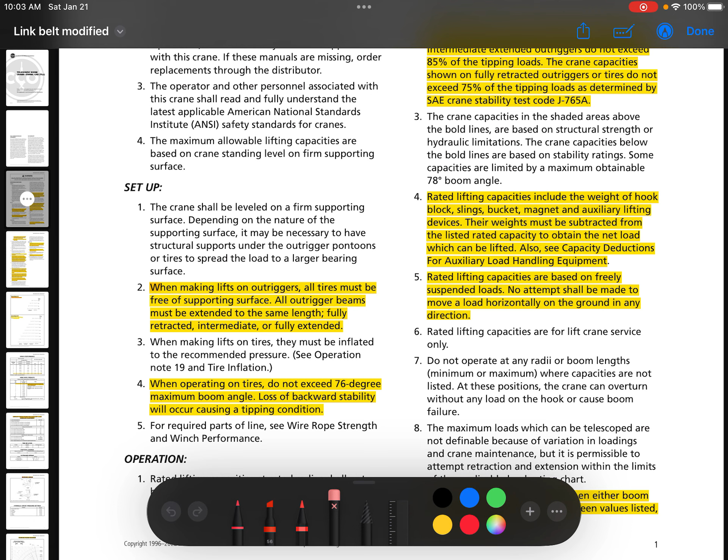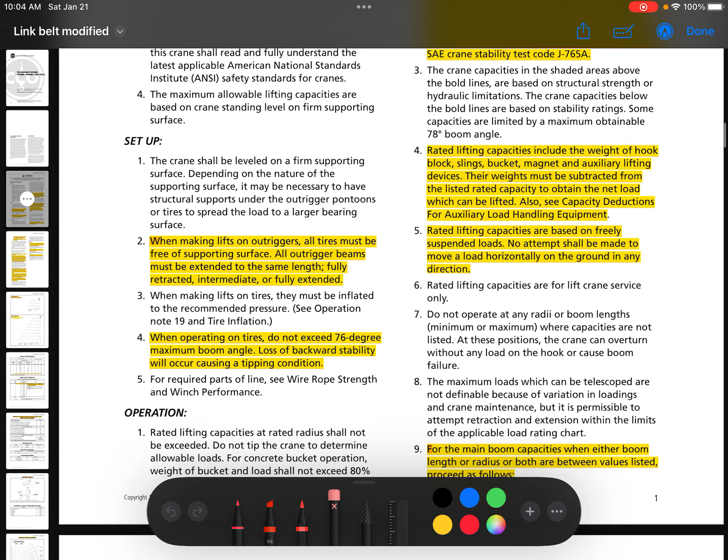So 2, when making a lift on all outriggers, all tires must be free of supporting surfaces. All outrigger beams must be extended to the same length, fully retracted, intermediate, or extended. So that's just saying your tires need to be free of the ground, essentially. You're technically not supposed to have your tires touching the ground. The reason being is they say, how do you know all the weight is off the tires? Because the tires are conversely part of the counterweight package, or the weight that's holding that crane on the ground.

4, when operating on tires, do not exceed 76 degrees maximum boom angle, or loss of backward stability will occur, causing a tipping condition. So remember that question. You might want to know it.

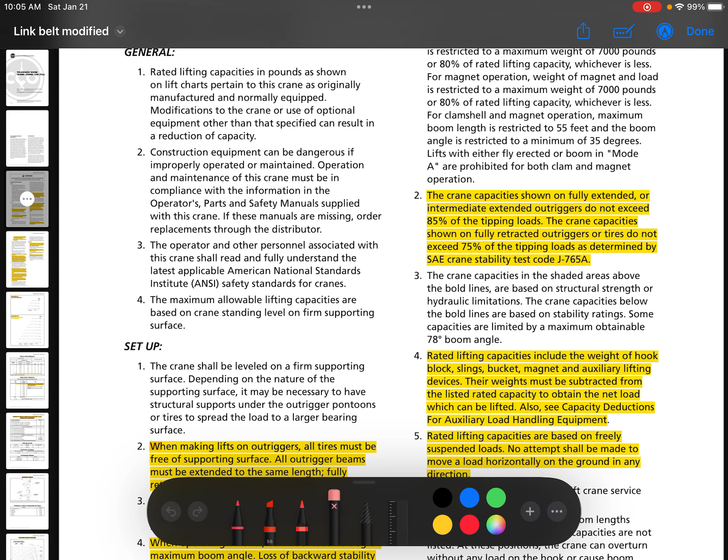Crane capacities shown on fully extended or intermediate extended outriggers do not exceed 85% of the tipping loads. So again, that goes back to 85% on outriggers, 75% on tires or tracks. That is your stability chart for the crane industry. The crane capacities shown on fully retracted outriggers or tires do not exceed 75% of the tipping load as determined by SAE Crane Stability Test Code. I'm going to jump down here to 4.

Rated capacities include the weight of the hook, the block, sling, bucket, magnet, auxiliary lifting devices; their weights must be subtracted from the listed rated capacity to obtain the net load which can be lifted. So your rated capacity, or your gross capacity in turn, is everything that your crane can lift. That number that's listed in the load chart, when you go to find your gross capacity, you look in the load chart. Your net capacity is that gross capacity minus your deductions.

So you take that rated capacity and you subtract. Say your block is 300 pounds. You subtract 300 pounds from that lifting capacity. You got a jib that's not in use, is stowed. Say it's 400 pounds. You subtract another 400 pounds from that lifting capacity, or that number that is listed in the chart.

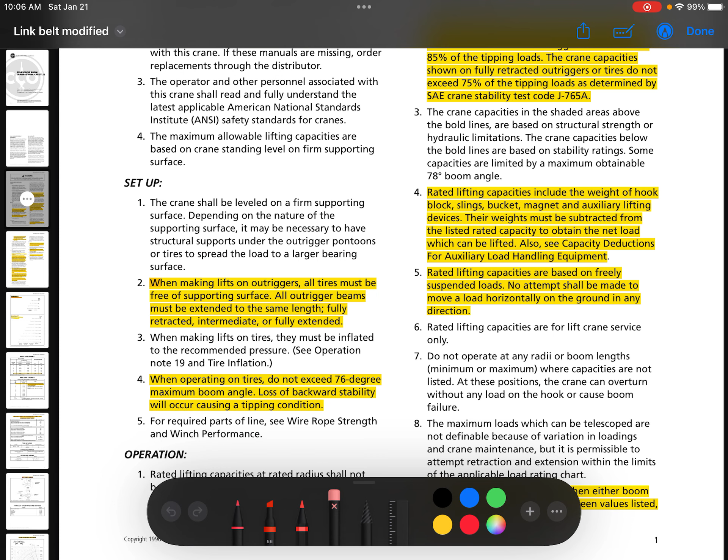Rated lifting capacities are based on freely suspended loads. No attempt shall be made to move the load horizontally on the ground in any direction. Remember that.

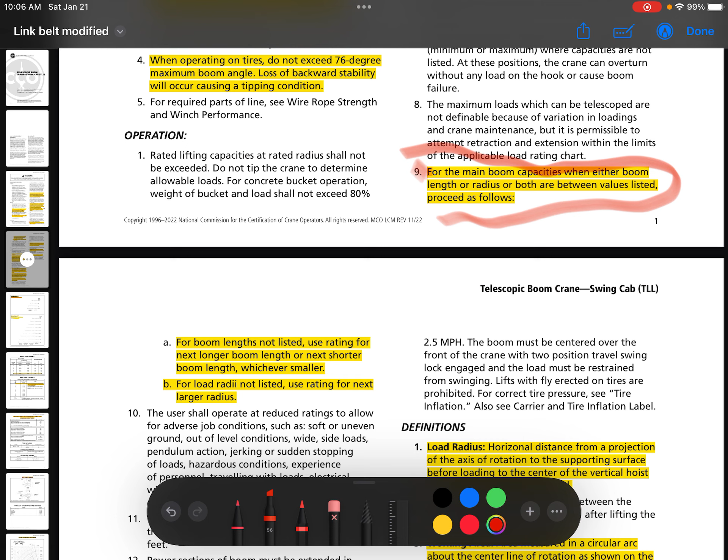9. For main boom capacities, where either boom length or radius or both are between values listed, proceed as follows. Remember this rule. You will need to know this for your test 100%. For boom lengths not listed, use rating for next longer boom length or next shorter boom length, whichever is smaller.

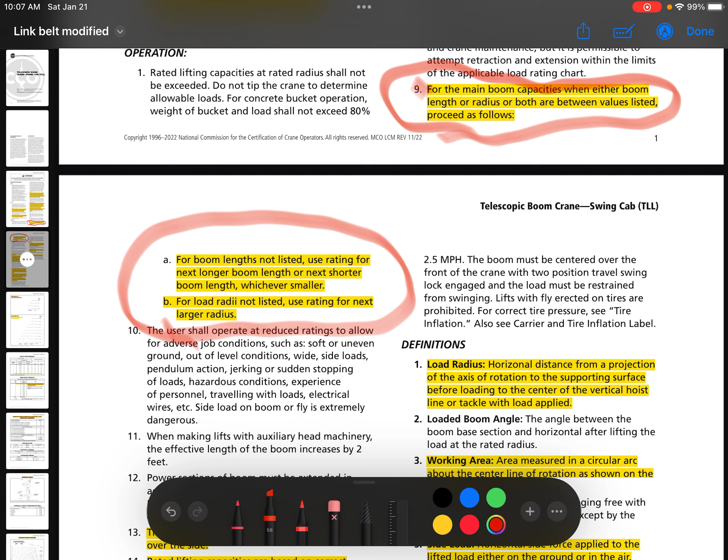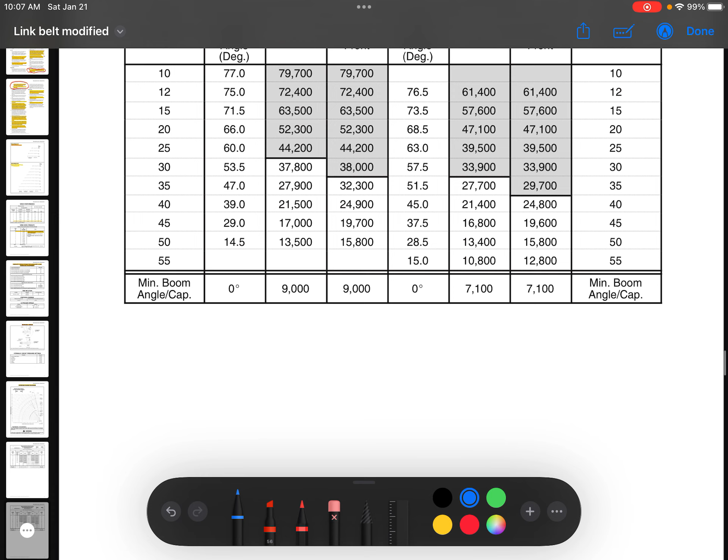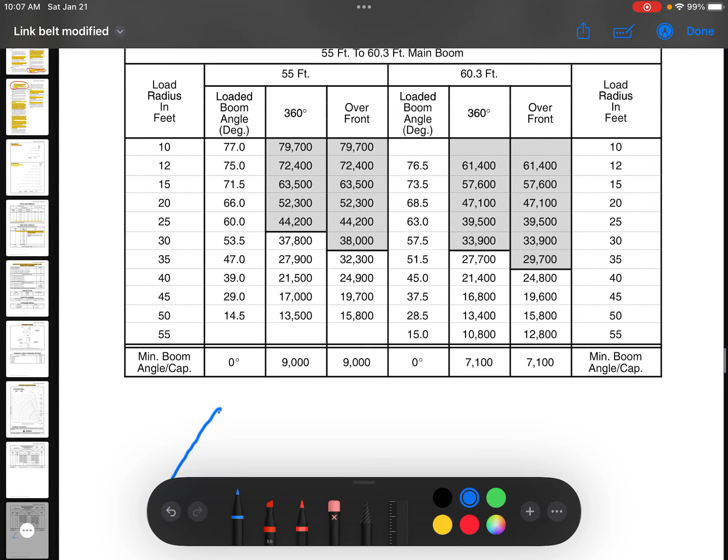All right. So what that means is we're going to come down here, just give you a little run through. Say we have a main boom length of 58 feet. That's our main boom length. We have a radius of 45 feet. So we're in the middle here. We're somewhere between 55 and 60.

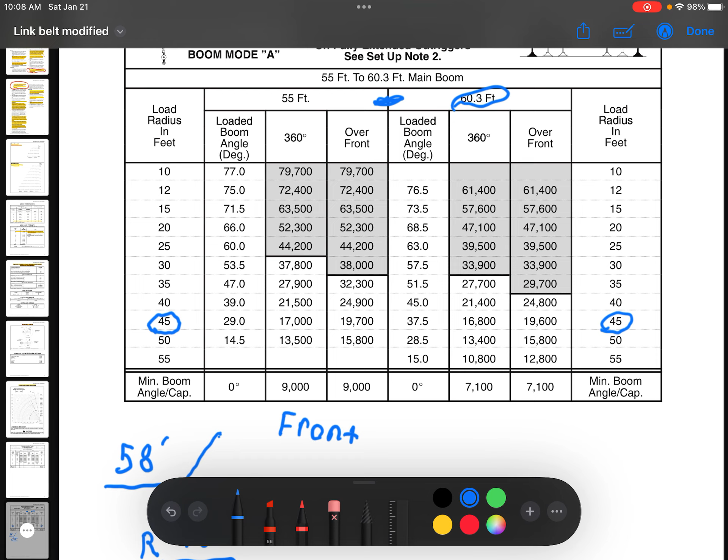So what we're going to do is we're going to come down here to our radius of 45, because you can find it from either side. And we'll say we're picking over the front. Well, we're going to be at 45 feet regardless of whether we're in the 60 foot boom length chart or the 55 boom length chart. So we're going to come down here and determine over the front which one has the lowest capacity.

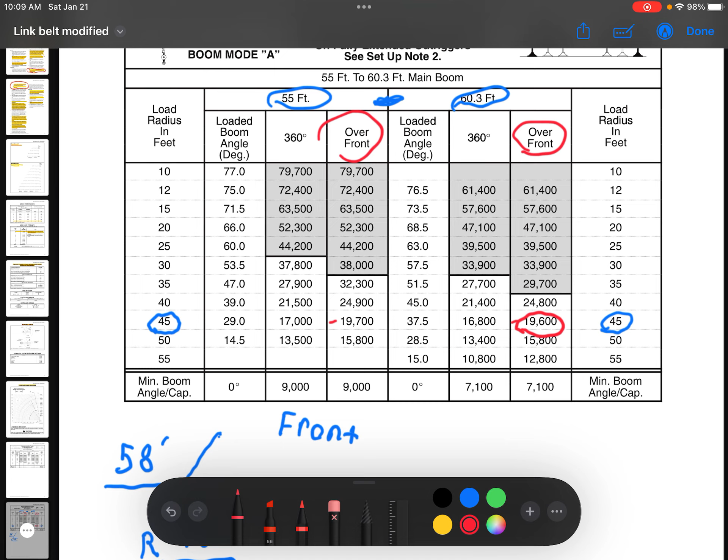Looks like over the front at 60.3 feet is 19,600 pounds, and over the front at 55 foot is 19,700 pounds. So we're going to go with lowest capacity, which is the over the front at 60.3 feet. The reason we go with the lowest capacity is you always go more conservative. So with the radius, we always go to the next longest radius. With the boom length, we go to the next shorter or longer boom length, whichever has the lowest capacity.

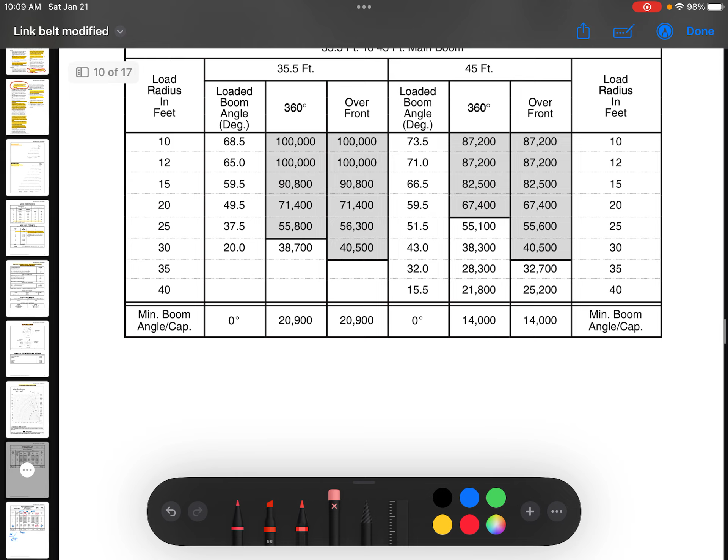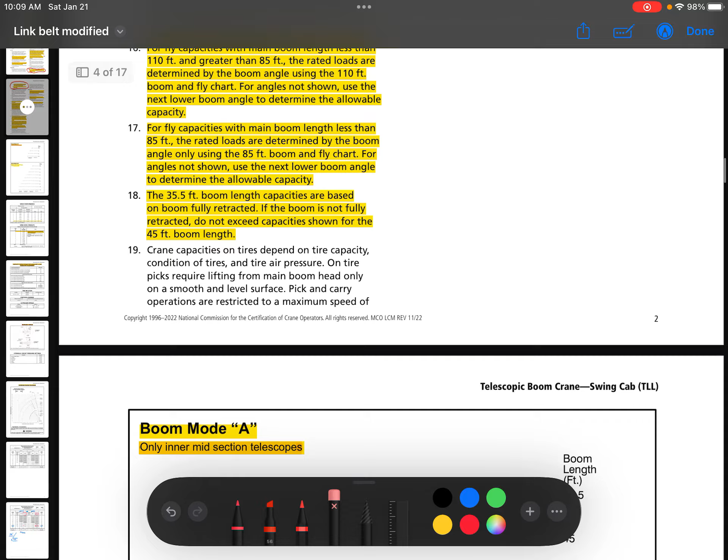So go ahead and scroll back up. We're going to go back to our load chart problems, and we'll elaborate a little bit more on that as we go. So remember, for boom lengths not listed, use the rating for the next longer boom length or next shorter boom length, whichever is smaller. Whichever is smaller.

You want to go with whichever one has the lowest capacity, because if you can get it at that radius with that lower capacity, you could get it at the shorter boom length. If you can get it at that boom length with the lower capacity, 100% you can get it at that radius with the greater capacity. So you don't have to guess when you're between boom lengths.

You know already, no matter where that chart is, it's between point A, this rated capacity and this rated capacity. If I'm somewhere in there, then I can pick up that load. So you always want to think conservatively when you're doing these load charts. B. So we're going to just erase this stuff here. I'll move down here to B on the question. For radius not listed, use the rating for the next larger radius.

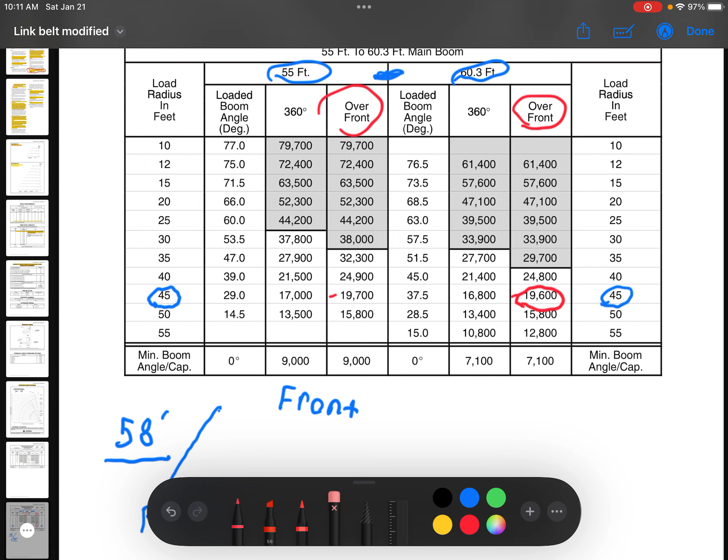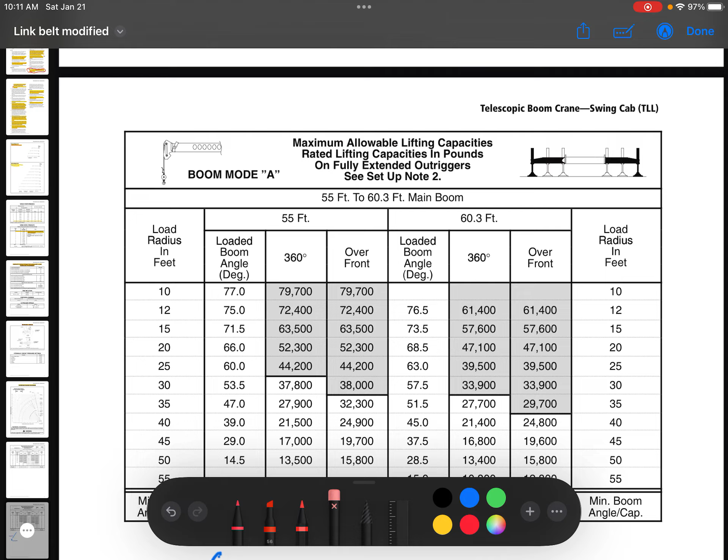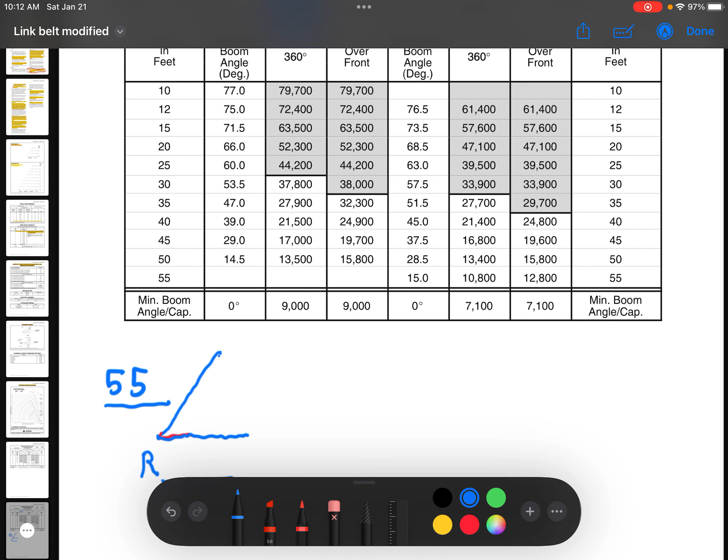So again, we're going to come down here. We're going to kind of use the same problem. This is kind of an easier chart. All right. So say we are, oops, I'll change my color, at 55 foot. Say we're 55 foot boom length, and we have a 37 foot radius. And we were picking main boom over the side.

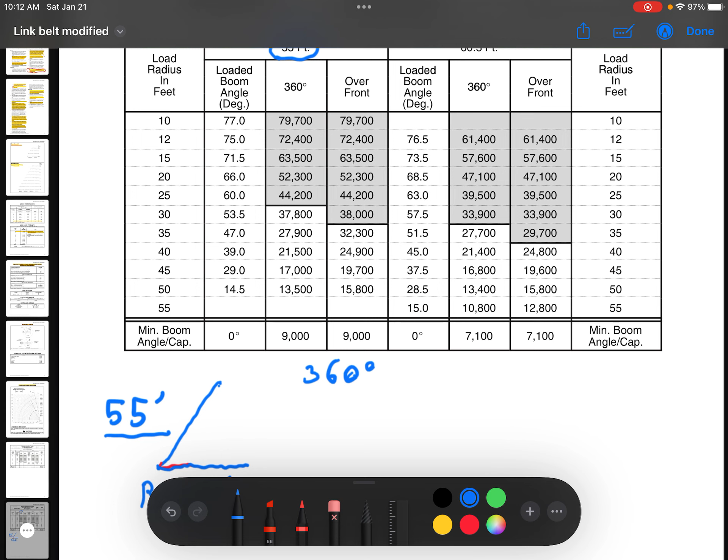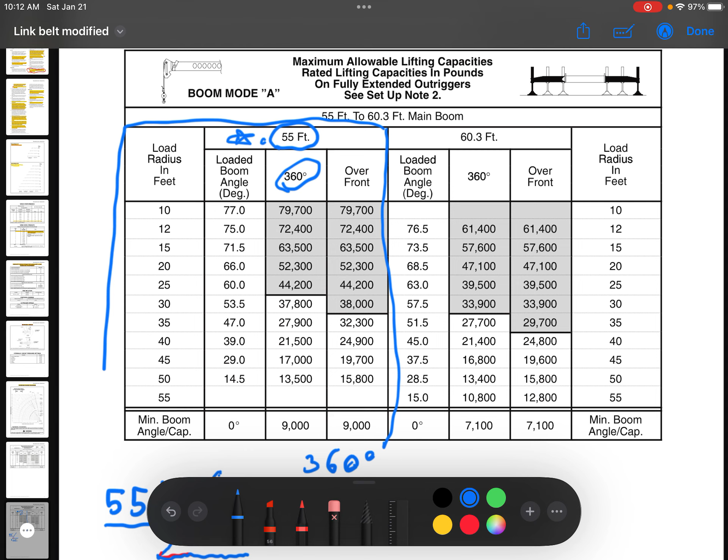So that's our 360-degree chart. We're going to come down here, 55-foot boom length. So we already got that selected. Now we need to figure out what chart we're in. It says 360, so over the side. So that's our 360-degree chart. So we know for a fact now we're working in this chart right here. But we're going to be between radiuses. So when you're between radius, you always go to the larger radius.

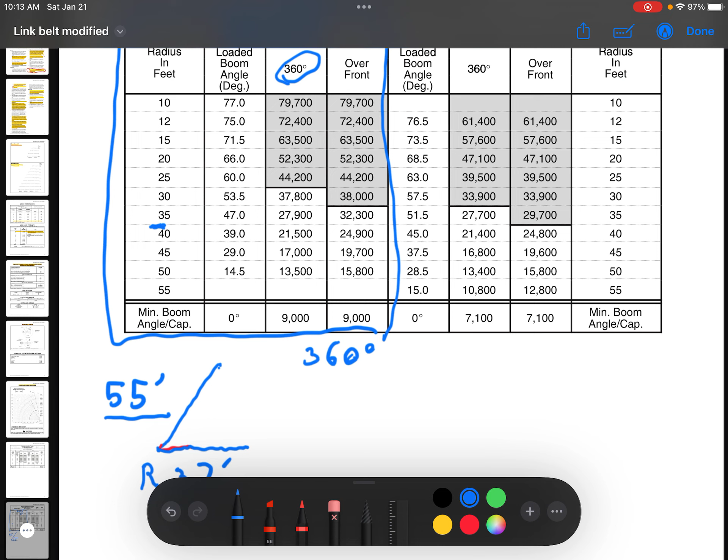So say we're at 37, so we're right in here, and we're between these two. Well, we're going to go down to the larger radius, and that's going to be 40. A 40-foot radius. So now we're going to come over here. We're going to look at our 360. So we're not using this one because this is over the front. We're going to be using this one. 21,500 pounds.

So remember, when you're between boom lengths, you go to the longer or shorter boom length depending on whichever one has the lower capacity, whether it be the 360 chart or picking over the front chart. When you're between radiuses, you go to the next largest radius. So if you're at 37, you're between 35 and 40, you go to 40. If you're at 42, you're between 40 and 45, you go to 45, and so on.

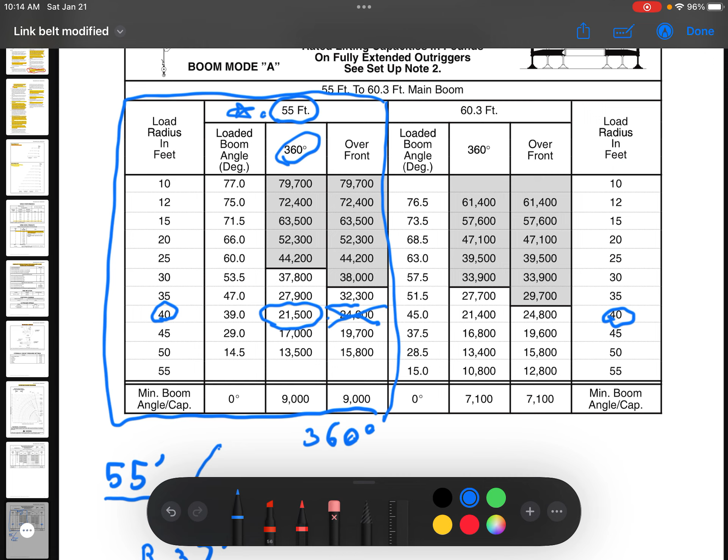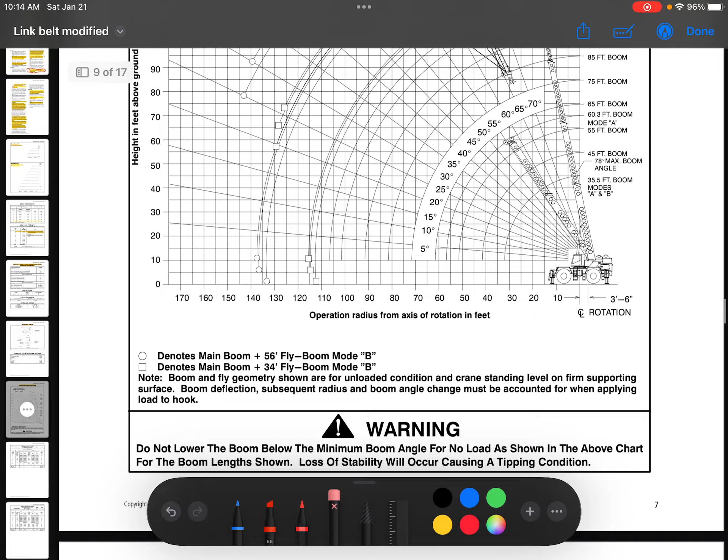Just erase all this stuff here. Scroll back up to our load chart notes, because there are going to be a few questions that are pertaining to your load chart notes. We'll skip down here to 13. The least stable working area on outriggers is over the side. So your least stable area is always going to be over the side. You don't have as long of a footprint. Your crane is not as wide over the side as it is front and back. So you don't have as much leverage.

14. Rated lifting capacities are based on correct reeving. Deduction must be made for excessive reeving. Any load that's bigger than the minimum required wire rope strength, which is 12,920 pounds, you have to add another part of line, which gives you another 12,920 pounds. Any reeving over the minimum required is considered excessive. Sorry, I'll let you follow along right here on 14.

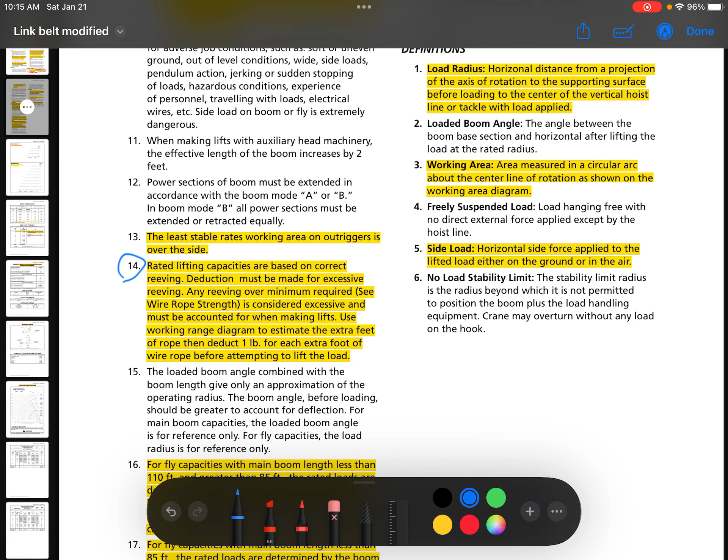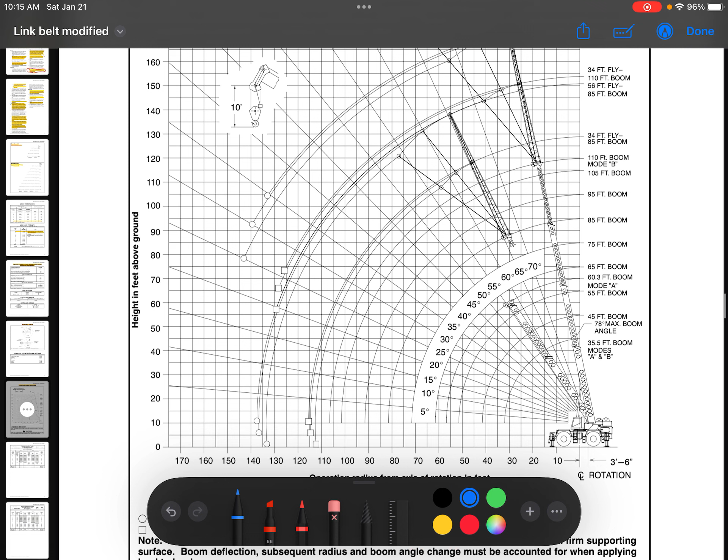Any reeving over the minimum required is considered excessive and must be accounted for when making lifts. Use the working range diagram to estimate the extra feet of rope, then deduct 1 pound for each extra foot of wire rope before attempting to lift the load. All right, so we're going to go over here. I'm just going to give you a quick rundown on your range diagram, because this is what we have to use to find our tip height. We'll just go ahead and split the screen. We're going to open up this document here.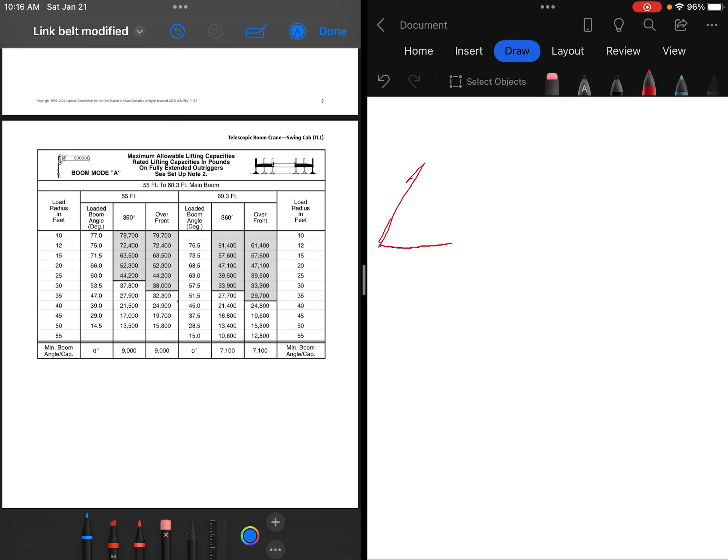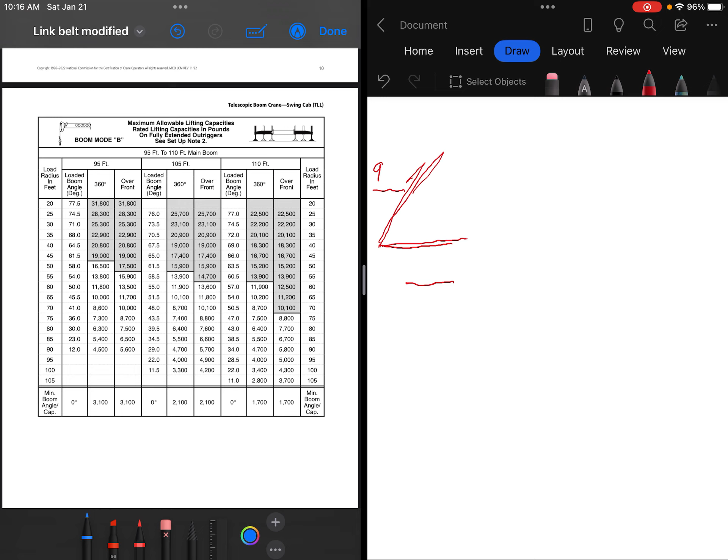So we're going to go ahead, say we've got a 60. Let's jump here. Boom. Draw our little diagram. Just going to do a mock test here. We've got a, let's find a little lighter chart. Main boom mode B, say we've got 95 foot of main boom at a 70-foot radius. That says boom mode B.

Say our crane is good for... Well, that's a bad analogy. We're going to erase this. We're going to do a radius of 40 feet. 95 foot of main boom at a 40-foot radius. That's going to give us right here. And we're in a 360 degree chart. Well, our line pull is only good for 12,920 pounds. That's our line pull. That's all we can pick up with one part of line.

And our gross capacity in this case is going to be 20,800 pounds. Well, we can't pick up 20,800 pounds with 12,920, right? So we need to part up. We need to add 2 parts of line. We need times 2 in order to be able to pick that up.

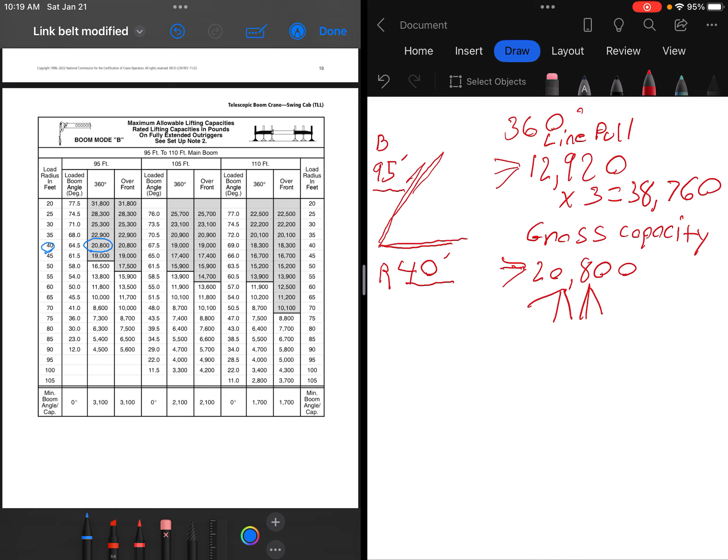All right, here's another one. Let's erase this. We have 3 parts of line. So at 3 parts of line, we're good for 12,920 times 3. We're good for 38,760 pounds. That's more than adequate to pick up 20,800 pounds. So we only need 2 parts of line to pick up 20,800 pounds. But we have 3 parts.

So we're going to use our range diagram. Say our tip height is 50 feet. So 50-foot tip height. We have 3 parts of line. Only need 2 parts. So you're going to subtract that single part of line tip to ground from that crane, or add it to your deductions, which is going to be 1 pound a foot, tip to ground.

So 50-foot tip height, because we have 1 extra part of line tip to ground, because we don't need that extra part of line to pick up 20,800 pounds. We only need 2 parts of line to pick 20,800 pounds. So that third part, we're going to deduct it from our crane's gross capacity. Remember, our gross capacity is that hard number in our chart. We're going to deduct that 50 pounds from 20,800 pounds. So it's gonna be a 50-pound deduction.

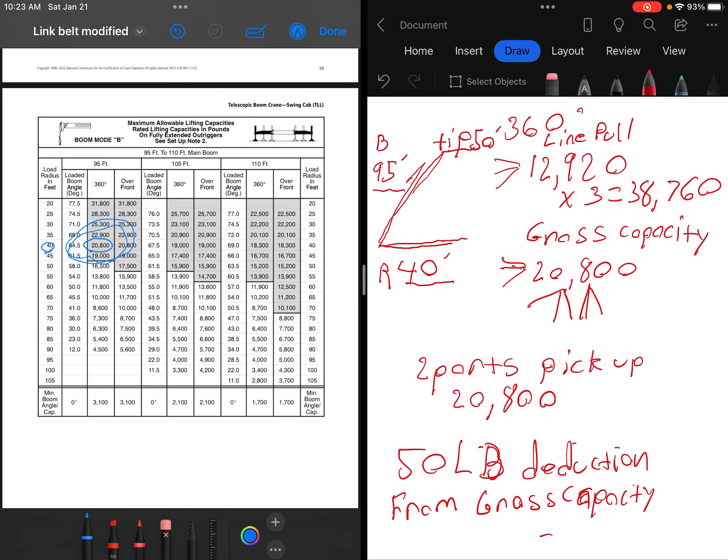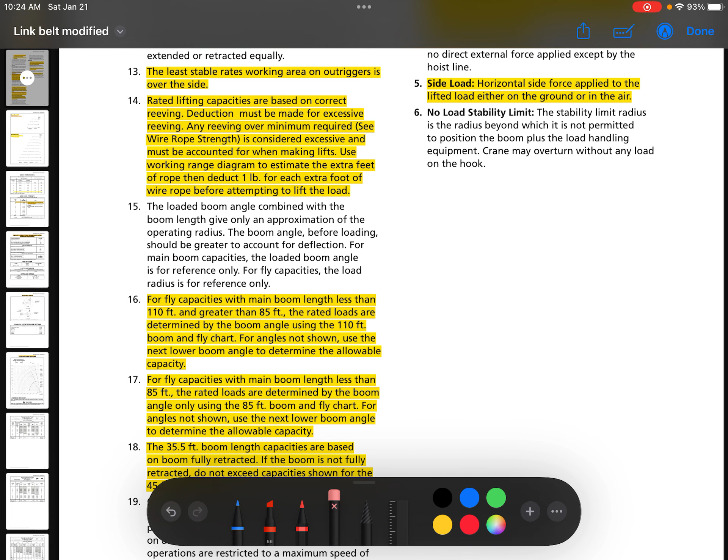Say you've got a 10,000 pound item you're picking up plus your block, your ball. Any excess reeving, when you look at your load chart, is still a deduction. So you have to figure that in as well to get an appropriate gross load question, so you get the answer right. Scroll back up here to the notes, and we will be going over some gross load problems as well. But we're just giving you a quick rundown of what you can and can't do.

All right, 16. There's another very important one. For fly capacities or jib capacities with main boom length less than 110 feet and greater than 85 foot, the rated loads are determined by the boom angle using the 110-foot boom and fly chart. For angles not shown, use the next lower angle to determine the allowable capacity.

All right, so we're going to break this question down. We're going to start with the fly capacities with main boom length less than 110 feet and greater than 85 foot. The rated load capacities are determined by the boom angle using the 110 foot. Okay, a little bit of information we got there. Whoops. So we're going to just break this down here.

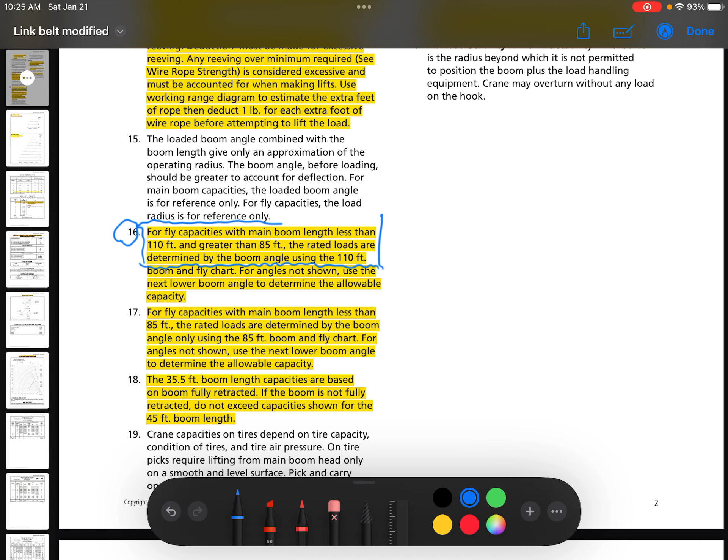So anytime you're less than a fully extended boom, you have to use the boom angle when using the load chart for your jibs. So we'll scroll down here to one of our jib charts. So here again, we're going to split this view. We're going to add in... I'm going to clear all this out here.

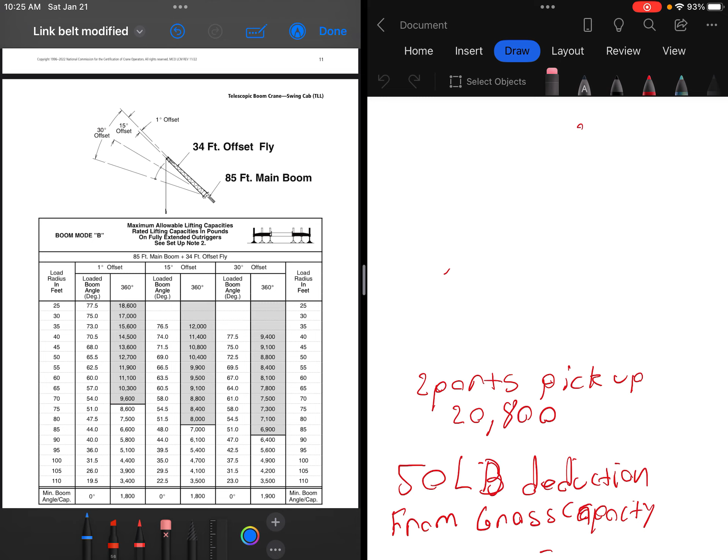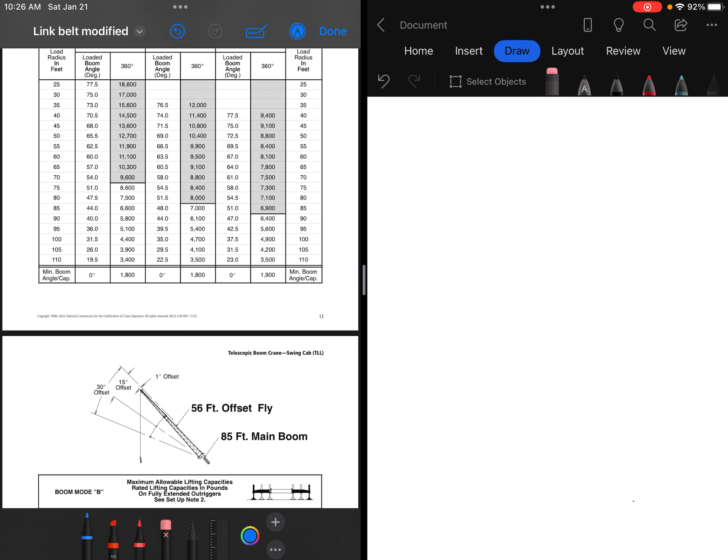All right. So say we have a main boom. I'm gonna draw our little diagram here. We're lifting off the 34-foot fly. Okay, so we got main boom B. We got 95 foot of main boom at, let's go angle here, at a 65.5 degree angle, main boom angle.

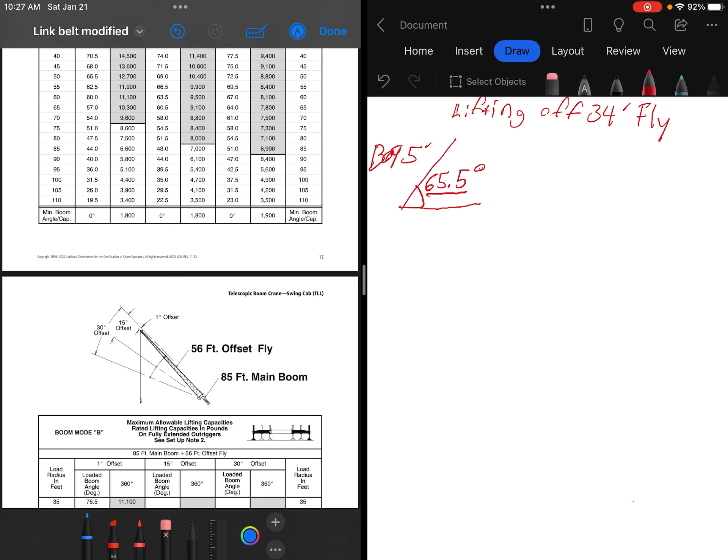So we got a boom that's not fully extended at 110 foot, and it's not fully retracted. It's not at an 85 foot. So the main boom's extended between 85 and 110 foot. We're using the 34-foot fly. So we're not going to use the 85-foot main boom with the 34-foot fly, because we're going to go to the next longest main boom when using a jib, or the fly offset they're going to call it, but it's a jib. So we're going to scroll up here.

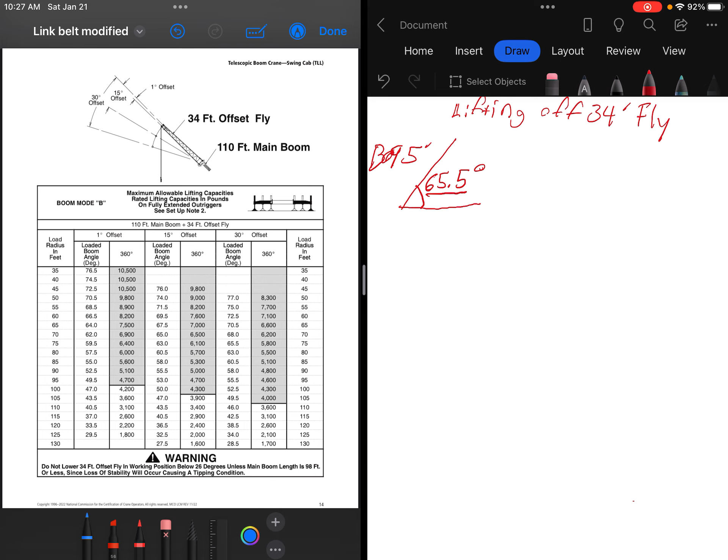We're going to find our 34-foot fly with 110 foot of main boom. Oh, here it is. Looks like I've already been doing some work. This is the one we're going to be using: 34-foot offset fly, 110 foot of main boom. And say our offset is 15 degrees. Let's come over here on the left side. We found our correct chart: 110 foot of main boom, 34-foot offset fly, 15 degrees. Remember, it's always going to be a 360 degree chart.

So we're going to scroll down here, just zoom in a little bit so you can see a little better. Since we're not fully extended to 110 foot, but we are greater than 85 foot, we are going to go to the next longest boom length. So that's the 110 foot boom length with this particular chart, the 34-foot fly. And that works the same for the 56 fly as well. If you're extended past 85 foot but you're not to 110 foot yet, you're automatically going to use the 110 foot chart with the boom angle.

So if they had a radius down here of 70 foot, you wouldn't use that. You'd use your 65.5 degree boom angle. The only time you can use the radius is if there is a solid number that is in the chart, say an 85 foot boom length or 110 foot boom length. Then you could use your radiuses. But if it's anything other than fully extended or at an 85 foot boom length, you have to use your boom angle. So we're going to use our boom angle.

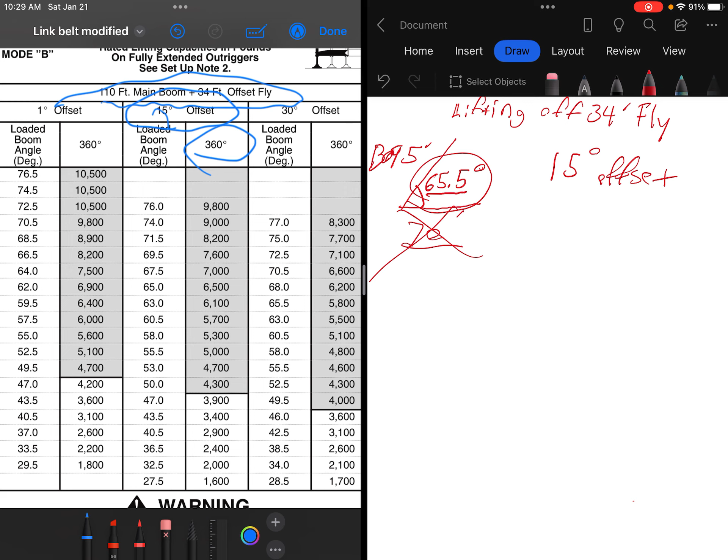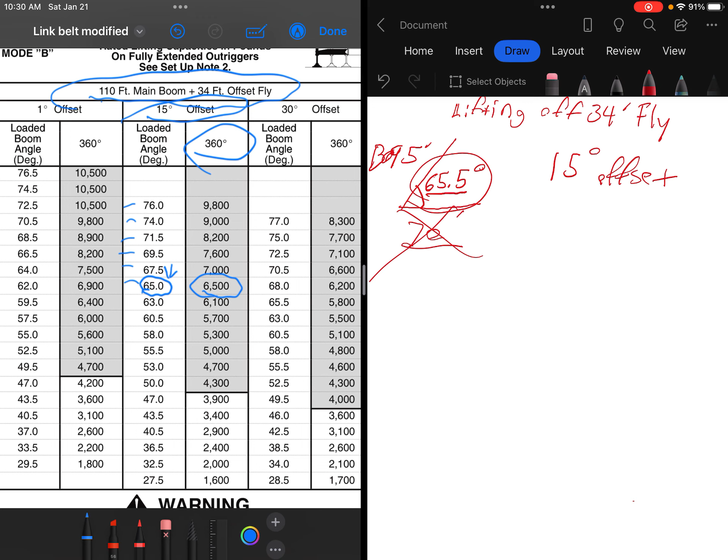So we're at the 15 degree offset, 110 foot of main boom, 34-foot fly, erected obviously. So we're going to go down here and find 65.5. We got 76, 74, 71.5, 69.5, 67.5, and 65. Well, we don't have a 65.5. So we're going to go down to the next lower, which is 65.0. So then 6,500 would be our gross capacity, because we always go down to the next lower boom angle if we don't have a listed boom angle such as 65.5.

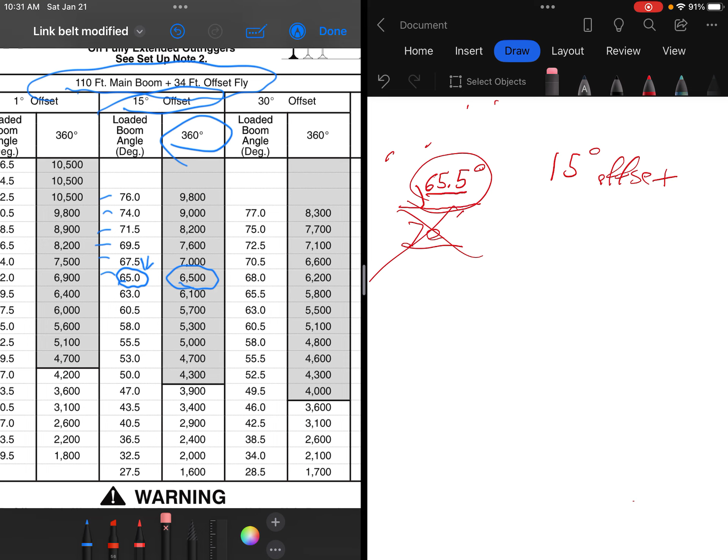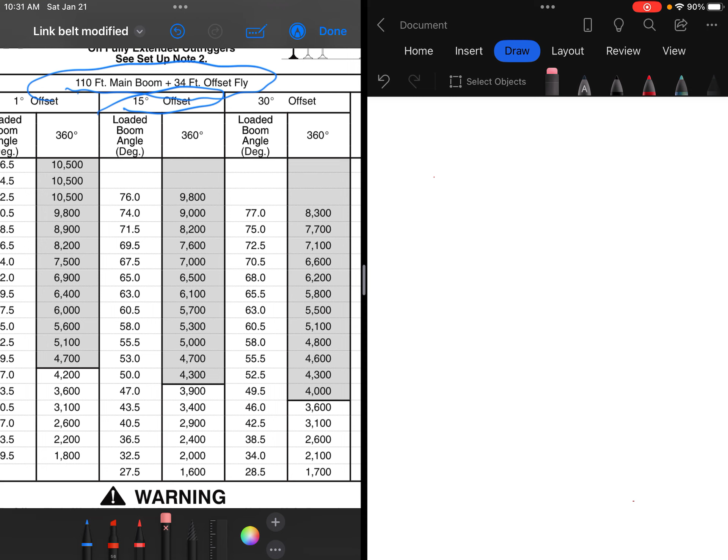Now, if we were over here at the 30 degree, we do have a 65.5, so then we would use 5,800 pounds. But we don't have a listed boom angle in the 15 degree jib offset, so we have to go to the next lowest boom angle. And we'll go over some problems like that in the load charts. As I said before, we just want to get you familiar with the load charts and the things you're allowed to do and the things you aren't allowed to do.

Let's go back up to our load charts. We just established that for the boom and fly chart, for angles not shown, use the next lower boom angle to determine the allowable capacity. 17: For fly capacities with main boom length less than 85 foot, the rated loads are determined by the boom angle only. Use the 85 foot boom angle and fly chart. For angles not shown, use the next lower boom angle to determine the allowable capacities.

So if you have a boom length less than 85 foot, again, we only have an 85 foot boom length and 110. If you have less than 85 foot extended, you're going to use the angles. Use the angles only for the 85 foot boom and fly chart.

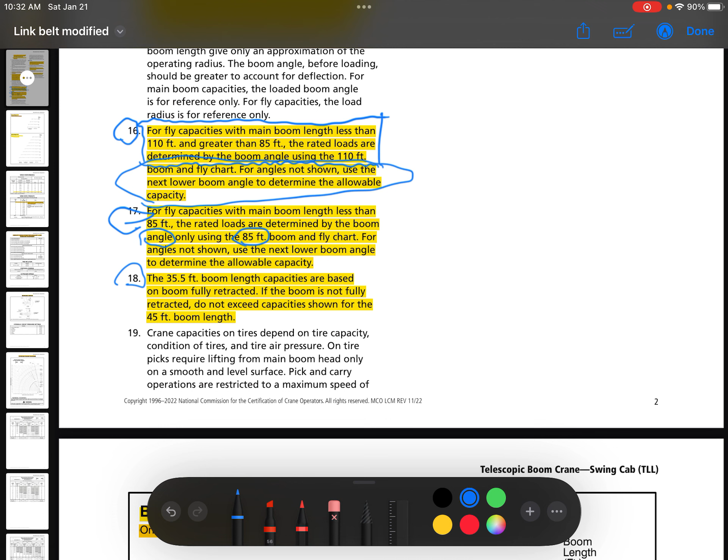All right, 18. The 35.5 foot boom length capacities are based on boom fully retracted. If the boom is not fully retracted, do not exceed capacities shown for the 45 foot boom length. So say our boom length is between here, it depends on our capacity, because this is considered full. 35.5 is your boom mode A fully retracted. That's all you've got. That's your first main section.

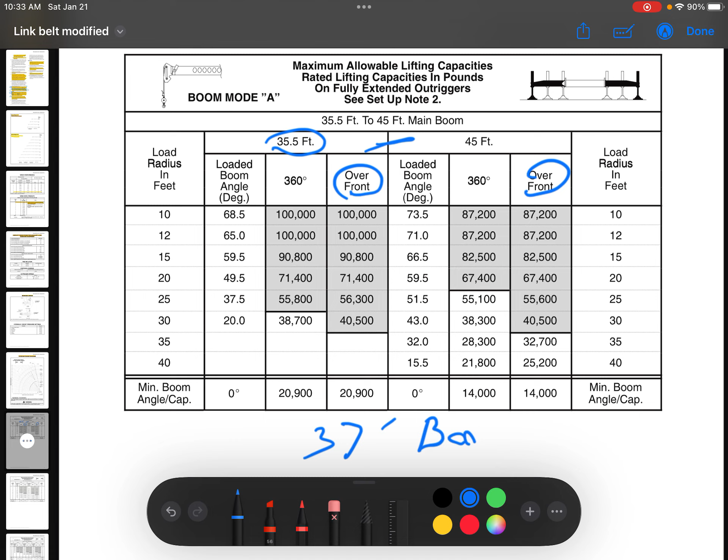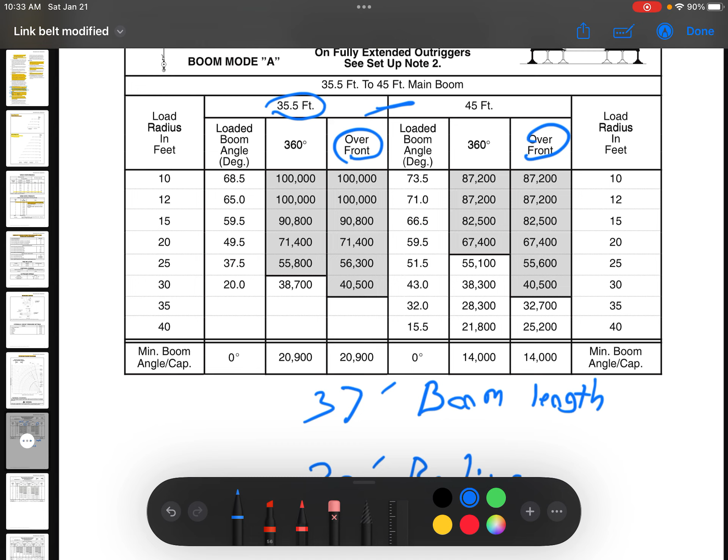Say we're picking over the front, say we're at a 37 foot boom length. So we're between 35 and 45. And say we have a 20 foot radius. We're going to determine for our boom length whichever is the lowest capacity, just like we did in the last one, and we're going to go with that one. So we are a 37 foot boom length, and we've got 20 foot radius. So we're going to be working here and here.

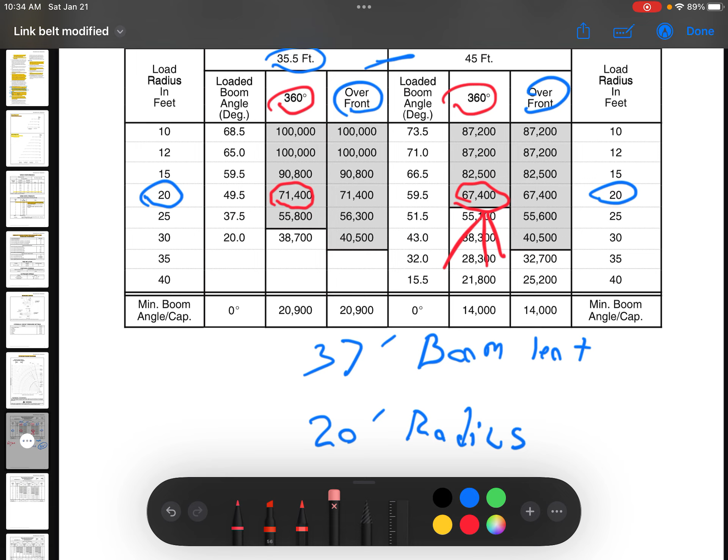Say we're over the 360 degrees. So we're going to be working here and here. So we're going to compare here, and we're going to compare here. So we're going to go with the lower capacity of 67,400 pounds. And that's going to be our gross capacity that we're going to go by for this load chart. So we're done with that one.

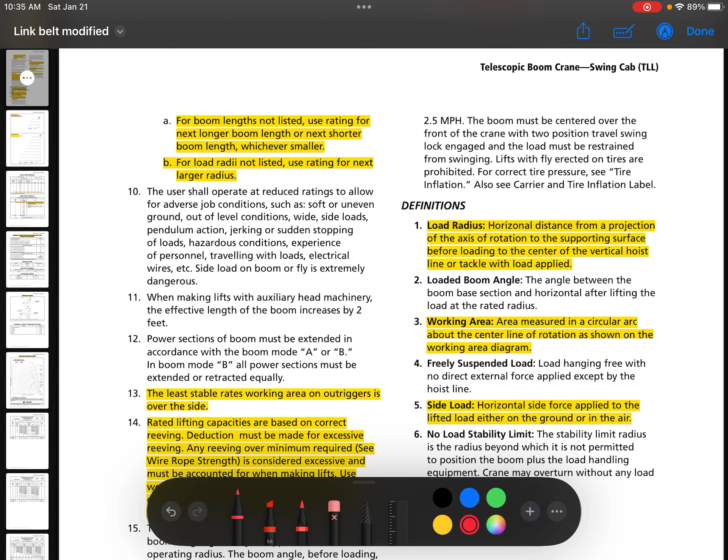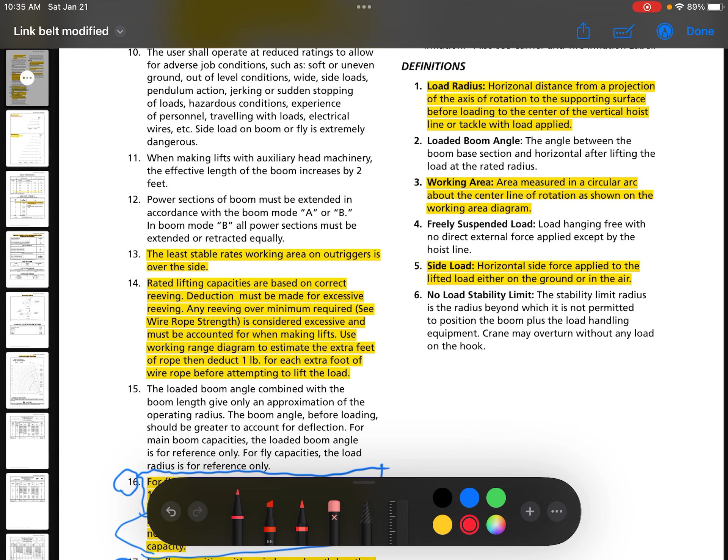And next, in load charts we have definitions. Load radius: horizontal distance from a projection of axis of rotation to the supporting surface before loading to the center of a vertical hoist line or tackle with load applied. Loaded boom angle: the angle between the boom base section and horizontal after lifting the load at the rated radius. Working area: an area measured in circular arc around the center line of rotation as shown on the working area diagram. Side load: horizontal side force applied to the lifted load either on the ground or in the air. So a horizontal load applied to a vertical plane is what that is going to be.

Now, you're going to get questions that give you load chart layouts that may ask you other questions. At face value, it'll look like a load chart, but when you read the question, it's going to tell you different. It may not even apply to that load chart at all, such as asking what sections on a crane scope out when. So remember, come to your notes. Your notes have a lot of information in them. Don't forget to read your notes.

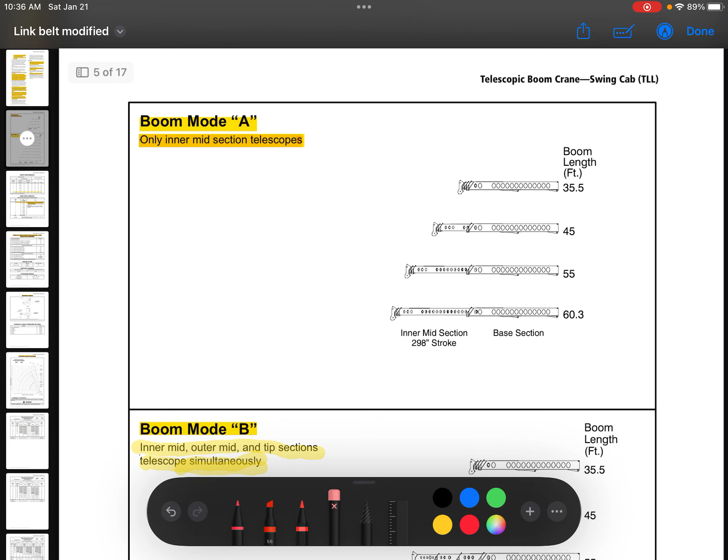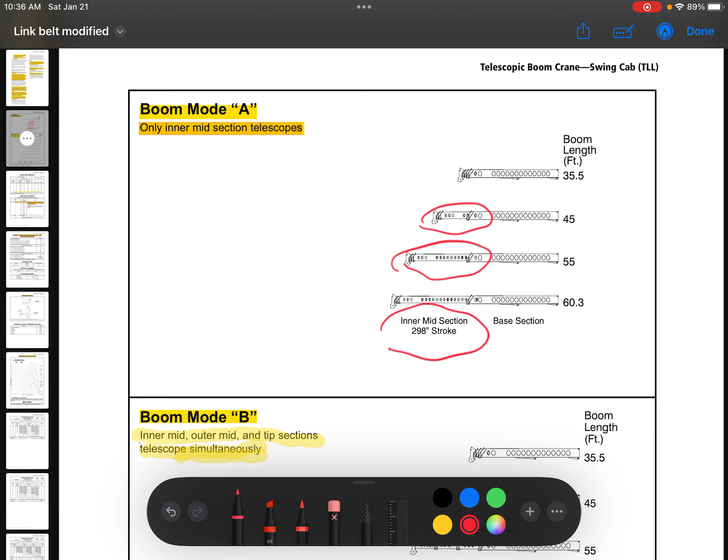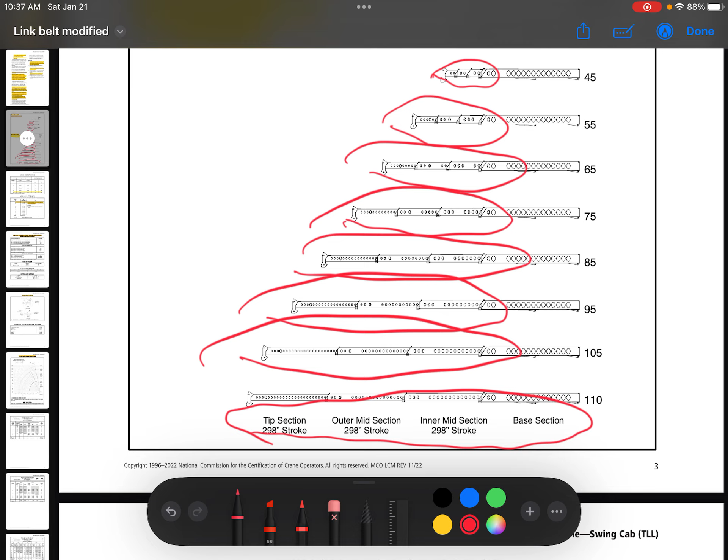Boom mode A, only inner mid section telescopes. That's it. It just got one telescoping section. That's going to be your heavy boom mode. Boom mode B, inner mid, outer mid, and tip sections telescope simultaneously. You see how they're all telescoping simultaneously? This is where all your sections are used. This is considered your long boom mode. Got your base section, your inner mid, your outer mid, and your tip section. So remember, boom mode B, inner mid, outer mid, and tip sections extend. Boom mode A, only inner mid section telescopes.

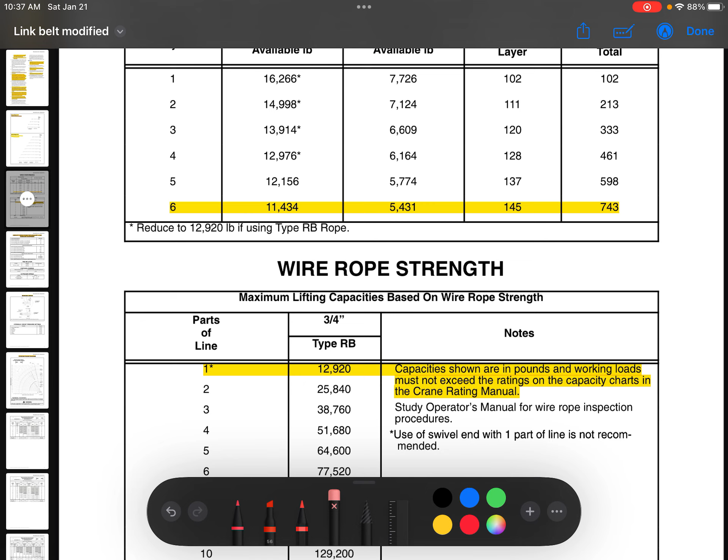Now, you may get some questions regarding your winch performance or your wire rope strength. We know our wire at one part of line is 12,920. If you need to find out how much your crane's good for per parts of line without using a calculator, just come over here in the load chart that tells you one part of line is good for 12,920. Two parts of line, 25,840. Three parts of line, 38,760. It's always going to be one part of line is good for 12,920. If you have 6 parts of line, you do 12,920 times 6. That's how you determine your load, or you take your load and divide it by 12,920.

So say we have a load of 50,000 pounds. To determine how many parts of line we need to pick that up, we'll take 50,000 divided by 12,920 pounds, and that's 3.87 parts of line in order to lift 50,000 pounds. You can't use fractional parts of line. 3.87 is a fractional part of line. You need to round up to 4 parts of line. So if we had 6 parts of line, then we would deduct 2 parts of line, tip to ground. That would be our deduction that would be added into our load chart.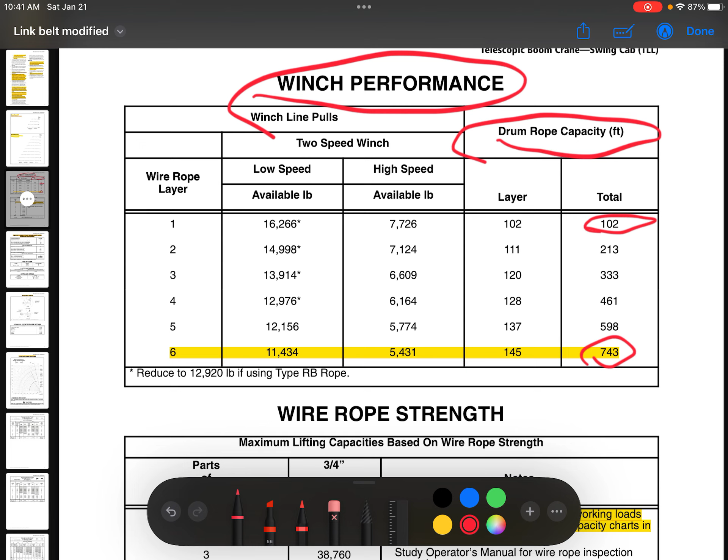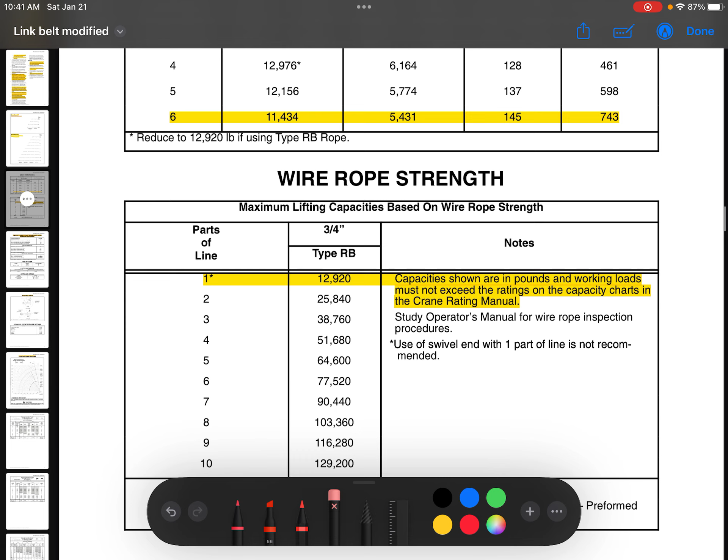Remember those questions. Wire rope strength, we went over that, 12,920 per one line pull. It's always going to be 12,920 pounds. That's never going to change. Now right here is our deductions page. Over here is your description of what deduction you're looking for. You just match that up with whatever is in the load chart, and then you add in the weight of that item.

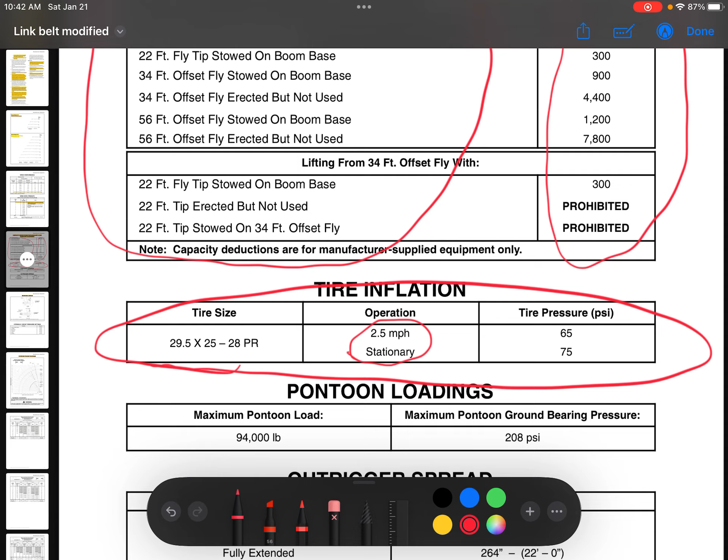Tire inflation is an important one too. You may have a question regarding tire inflation or operating on tires. So if you're on tires, your operating speed driving on tires with your boom erect is 2.5 miles per hour. You won't need to really know anything about your outrigger spread.

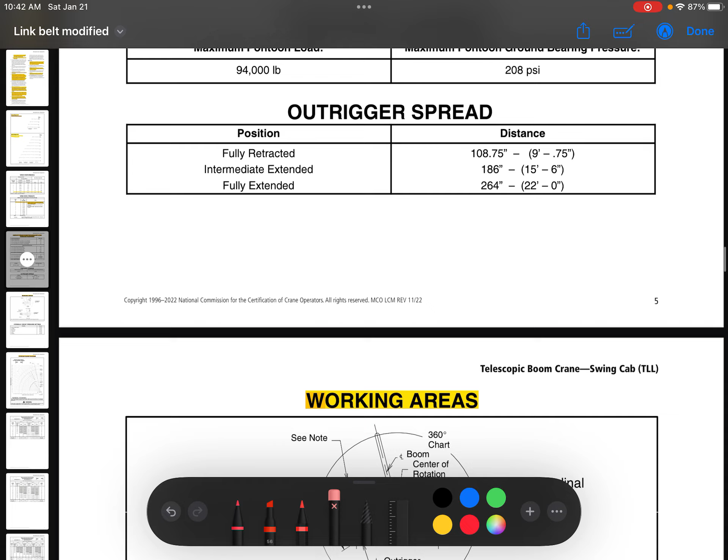When it asks where do you find the areas of the crane you can work over, it's your working area diagram. So this shows that you can work a 360-degree chart. You see how they got this circle around it? Those are the areas that you're allowed to work on this crane. 360 degrees. This is your working area diagram.

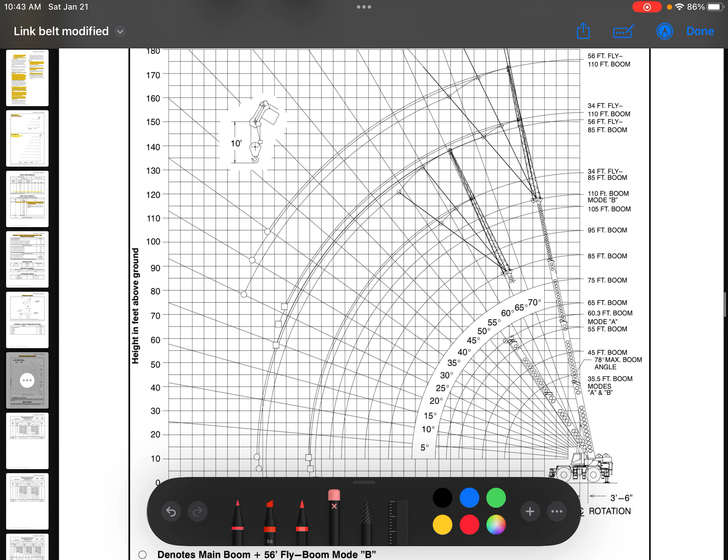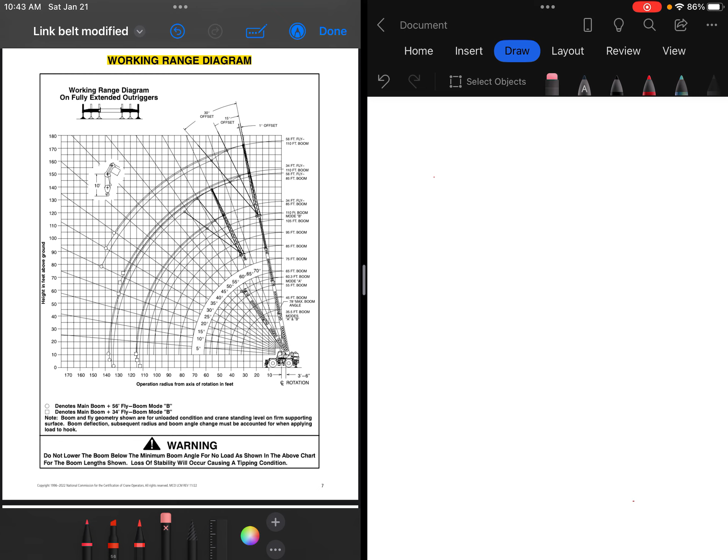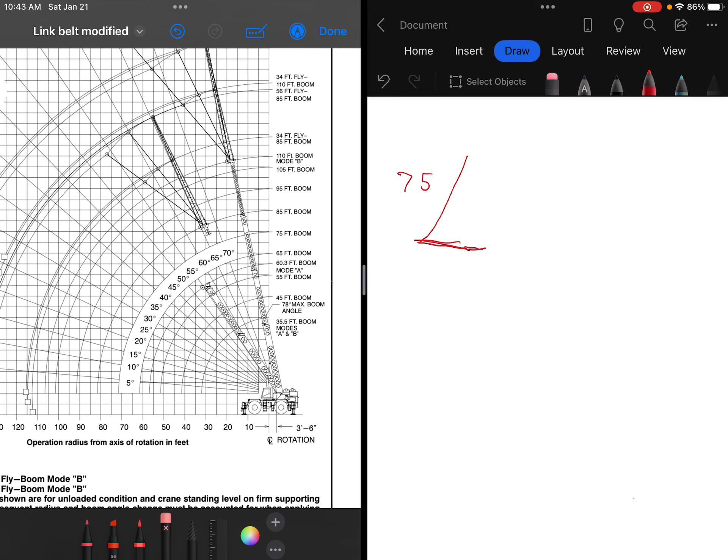Range diagram. So this is where we're going to come and find our tip height. An easy way to find this out is, let's jump over here. Say we've got 75 foot of main boom, and we've got a 30-foot radius. So we're going to come over here, find 75 foot, 30-foot radius. I'm going to bring this arc down, and I'm going to bring this one up.

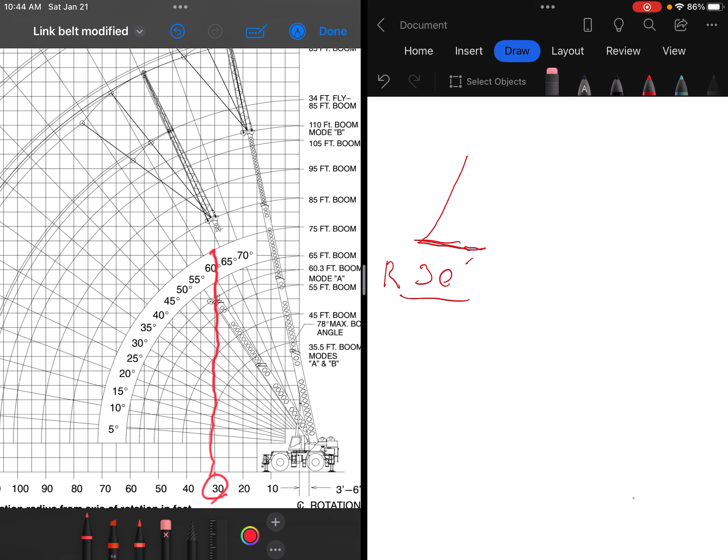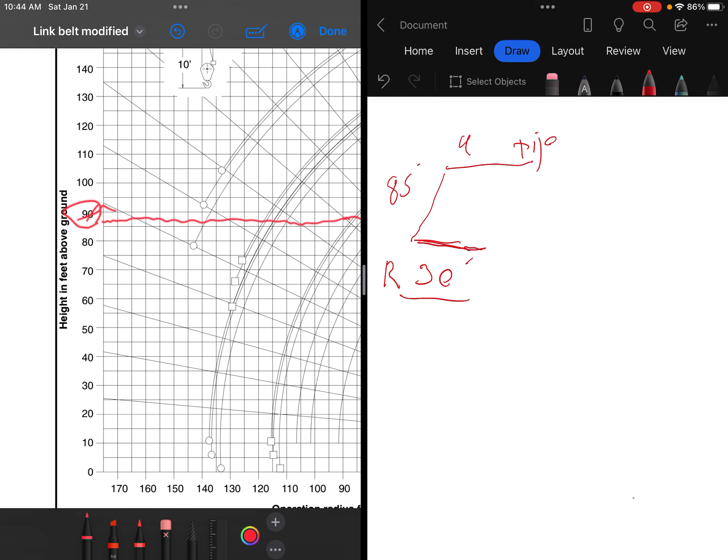Yeah, that's a bad example. Let's say we've got 85 foot of main boom. Arc it down. Bring this up. So that puts us between tip heights. Follow it all the way over to the left side. You always go up when you're at a lower tip height. So we're going to go up to 90. So 85, and I got a tip height of 90 foot. That's how you find your tip height.

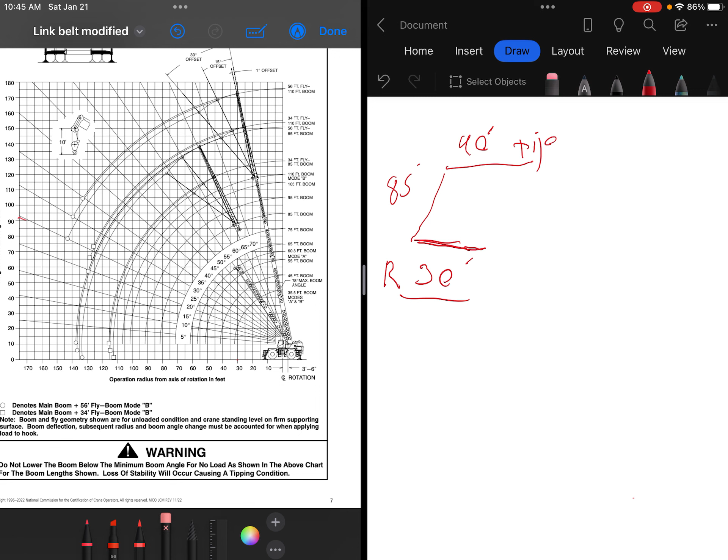So we're going to do another one here. I would use 85 as an example. Erase this. We got an 85 foot boom length, and we've got a 70-foot radius. So we're going to follow that line up to where we meet the 85 foot. It's going to be in the middle. And we're going to follow this over. Since we're in the middle, we're going to go up to 60 foot. That's going to give us a 60-foot tip height.

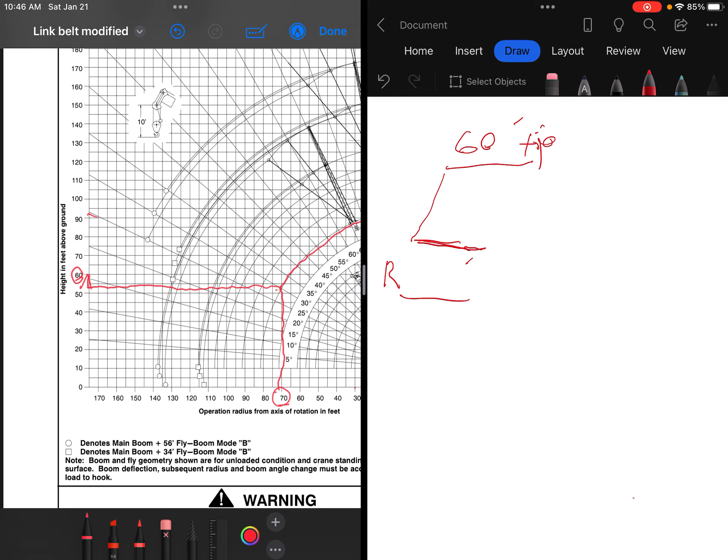Now, this is only for the range diagram. Most of your problems are going to be right at a tip height. They're going to intersect at an actual tip height. Say, it's going to be at the 40-foot line. It'll generally be right on a line. Most all of your questions are going to be right on a line. But that's how you find your tip height.

You run your arc from your main boom down to wherever your radius is down here. Follow that line over to the left hand side and circle whichever tip height is over here, and you're going to write it in your tip height spot.

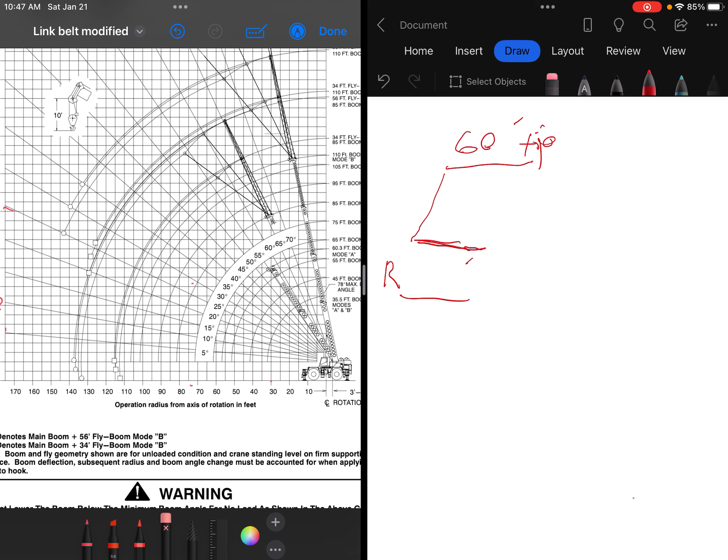Right. And I think that's pretty much it for our tutorial here. We went over our working range diagram, we went over tip heights, we went over pretty much everything that you're going to see on the load charts.